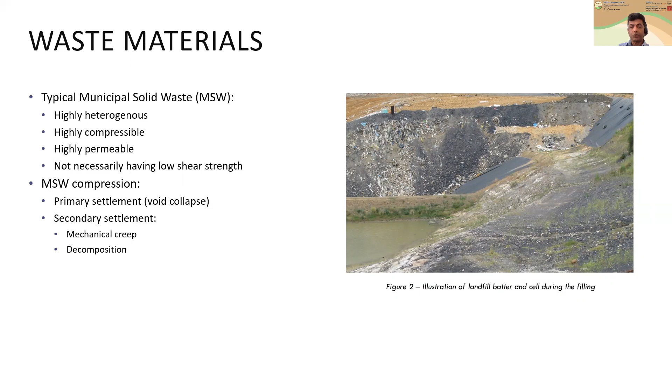Site investigation is very important to characterize the waste properties. It's better to do a staged approach. First, review all the available data, historical data, and waste placement records. Especially these waste placement records, so the as-built information, are very important to see the presence of the cell base and the liners. You can use non-intrusive techniques, geophysical techniques, or intrusive techniques such as boreholes.

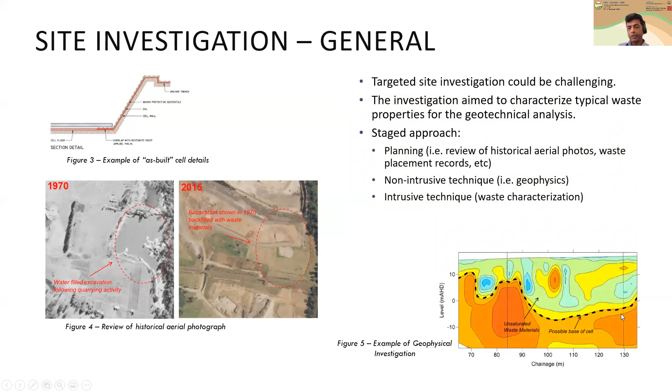So geophysical techniques as shown here are very useful, especially to identify the base of cells. A site investigation may consist of boreholes, test pits, and cone penetration tests, etc. So sufficient boreholes with reasonably good continuous sampling are required. As shown in this figure, continuous sampling is very important so that we can identify waste constituents and their proportion with depth.

Since we can't take this material to the lab due to health and safety reasons, all observations should be on site. So we can describe color, odor, as well as estimate weight and volume. It's good to take some high resolution photographs so that you can refine your findings later on.

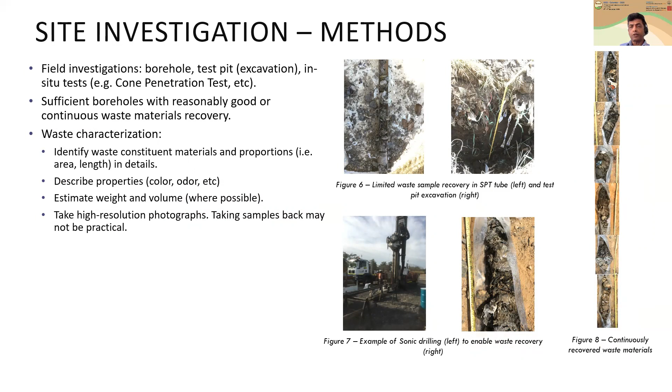A few important properties are the density, moisture content, and organic content. You can use literature data to get some relationship between the organic content and moisture content, so you can refine your findings. Another important property is the waste compressibility index, which is related to moisture content, density, and organic content, and which in turn is related to compression ratio, which is of course very important in assessing the primary settlement.

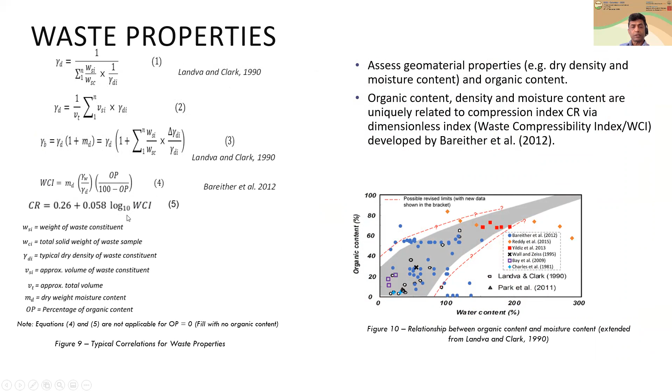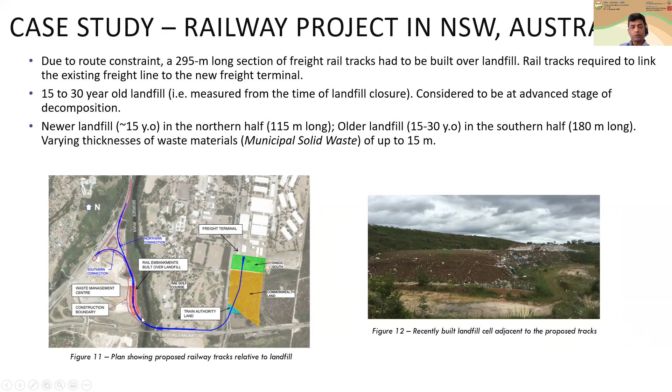The case study we would like to present here is a rail project in New South Wales, Australia. As you can see, the existing rail line needs to be connected to a terminal, and part of this connection falls over the waste facility, about 295 meters long, out of which about 115, the northern part, is in younger fill, about 15 years old, and the southern part is on older fill, about 30 years old. However, these older fills are pretty thick, maybe about 15-meter thick landfill.

We carried out geophysical investigation as well as sonic borehole drilling. So each borehole was carefully observed and constituents have been checked. Based on these constituents, we obtained the waste compressibility index. In addition, we had some information from the trial carried out in 1985. Based on that information, we also derived the waste compressibility index.

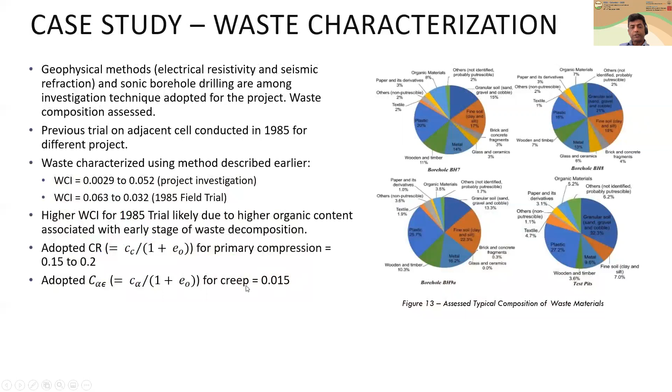You can see a higher waste compressibility index in 1985, maybe due to higher organic content associated with an earlier stage of decomposition. Anyway, based on this waste compressibility index, we came up with the compression ratio to be 0.15 and 0.2. And then we also adopted a creep rate of 0.015, mainly based on literature showing the relationship with the waste compressibility index. And there is also evidence that this is related to the bulk density of the material as well.

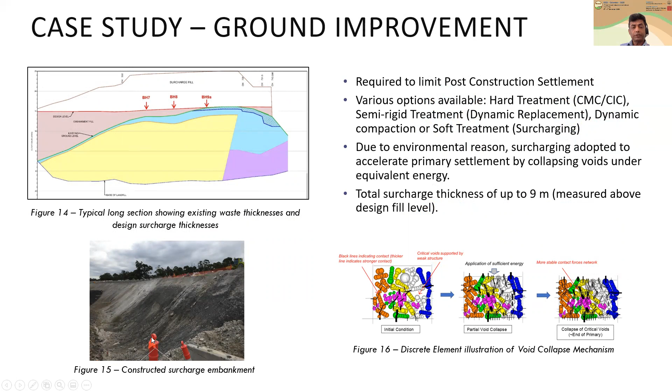As you can see in this figure, this line shows the finish level of the rail line and then the existing fill surface, pretty thick embankment within the new fill area and shallow embankment within the old fill. Due to this thick landfill, we need to have a higher surcharge. Out of many possible options, we decided to go for surcharge. And you can see the constructed surcharge embankment here is a pretty high embankment.

During this construction, it's very important to have instrumentation and monitoring so that we can assess the performance of the embankment and confirm the design. So we install instruments including settlement plates, some here, some here, and a few here. To supplement settlement, a fair number of hydrostatic profiler gauges, which can be used to observe the settlement continuously across the embankment cross sections, and inclinometers to get the lateral deformations, which will be very useful in assessing the stability of this high embankment, and also some survey monuments to supplement the settlement monitoring.

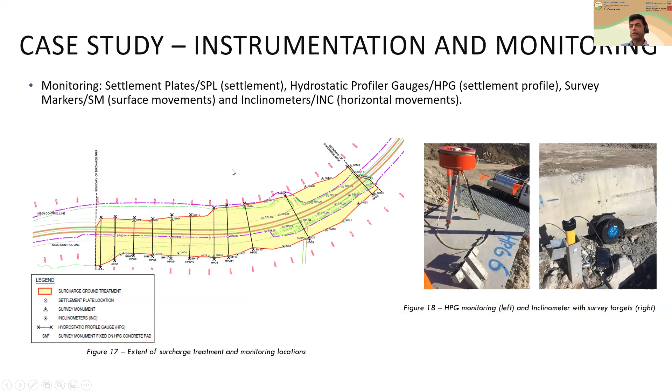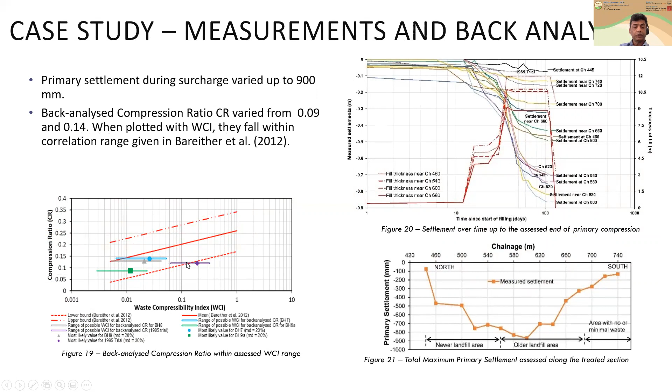As you can see here, the settlement observed is about 900 millimeters. Different settlement plates, as you can see along the full length chainage, show higher settlement in the old landfill area where landfill thickness is about 15 meters and the surcharge is also pretty high. Back-analyzed compression ratio is about 0.09 to 0.14, which is slightly less than we adopted, and also these numbers fall within the available literature limits.

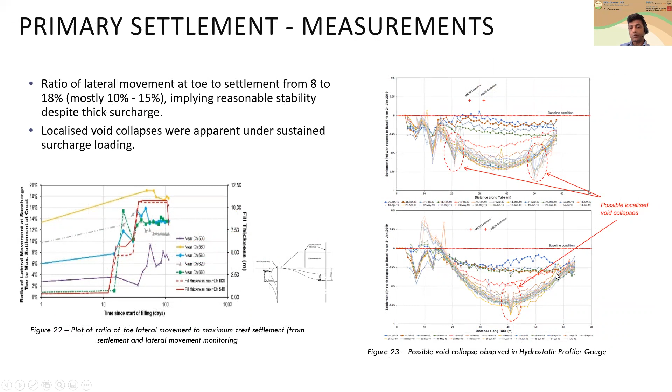We also check the ratio between lateral deformation and the settlements. That ratio is about 10 to 15. So we know that that ratio indicates reasonably stable conditions despite this very high surcharge or high embankment. As you can see, the hydrostatic profile gauges show some spikes, maybe due to localized collapse of voids across that embankment cross section.

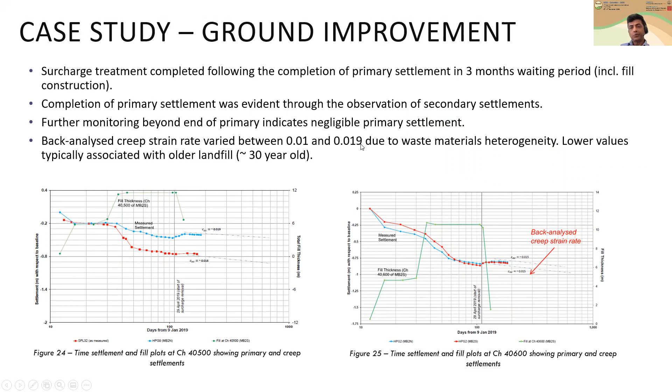What we observe is the completion of primary settlement occurs within about 3 months. As you can see here, it is relatively very quick, and then it tends to show some secondary settlements start, and because of some unloading, some unload and then settlements. The back-analyzed creep rate is about 0.01 and 0.019, which is very similar to what we have adopted.

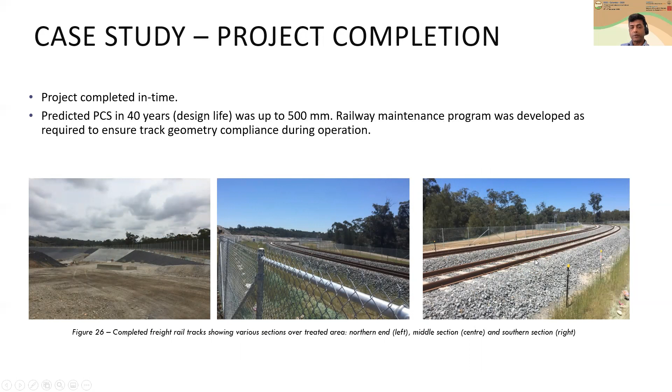So in conclusion, the application of conventional site investigation and characterization on solid waste material could be challenging. So we'll have to be very careful how we carry this out. We characterized the waste material and then we came up with these properties. Full monitoring is very important. It is primarily very important for the back analysis and confirming your design. Strain rate is typically related to void ratio and bulk density. And estimation of primary is critical for the design so that we can design our surcharge thickness.

This case study indicated reasonable correlation between the back-analyzed compression ratio and the dimensionless index, the waste compressibility index. And creep was evident following the completion of critical void collapse, especially during primary. So further monitoring beyond the end of primary so far indicates reasonable observations of creep.